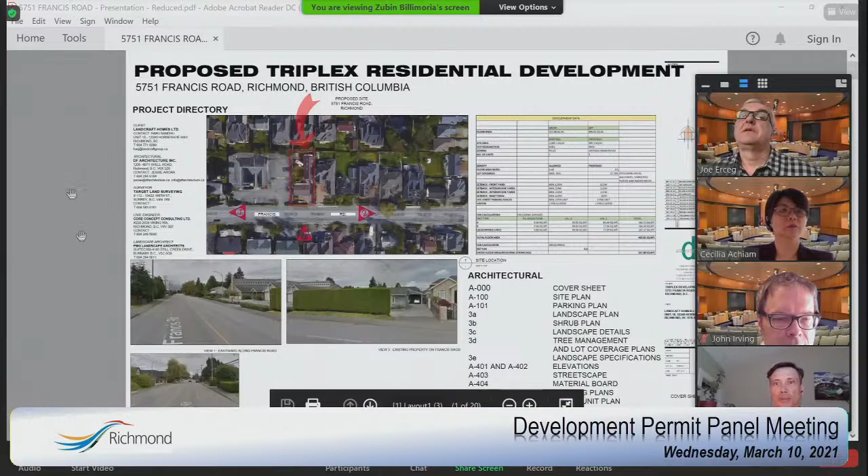Hi everyone, my name is Gordon, registered architect from DF Architecture, here with Zubin and Ray, also on the project. And from PMG Landscape Architecture, we have Denisa, who will be going up after us.

Just a quick run through for the context of the site. As Joe summarized, it's on 5751 Francis Road, with the aerial photo over here. Currently proposed as a triplex, just a slide through of the site.

There's a common driveway providing access to the three units, type A, B, and C, with type C being the convertible unit. Each unit has side-by-side garages with recycling and refuse inside the garage, and there's a common staging area for garbage outside as well.

There's a small pedestrian walkway within the common driveway for access to the two units in the back, B and A. There's a visitor parking space beside the type A unit. Each unit has access to a large outdoor amenity space: this one for type C, this one for type B, and over here for type A.

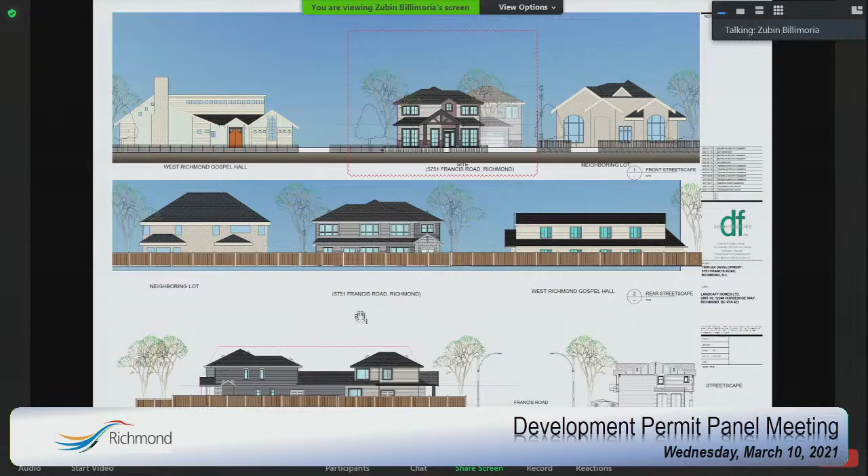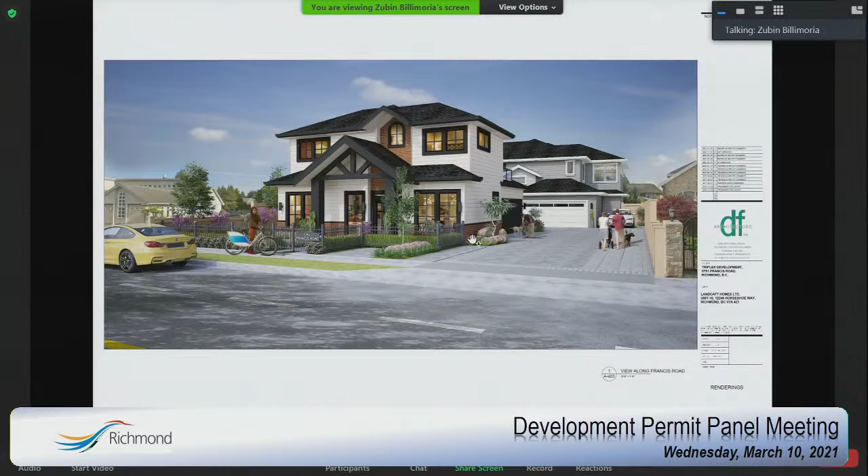Moving on to the materials we're proposing. Here are some renderings showing the proposed materials: some brick, and some stone on other facades. We have Hardie siding, and I'll fly through the renderings to give context. We have Hardie siding for most of the cladding, and Hardie shingles also proposed.

The site is well lit with bollard lights and exterior lighting for each unit. Exterior lighting is provided to keep the site well lit for both safety and aesthetic reasons. All proposed fixtures are downlights to reduce light pollution and to highlight the entrances of each unit.

The landscape architect can get into this more, but all the landscaping proposes shrubs lower than eye level, with lower branches above eye level, to keep sight lines in place. We placed windows strategically facing the interior driveway to give more surveillance of the common areas, while also keeping in mind privacy between each of the units.

In terms of sustainability, we have a few things that we're proposing. High reflectance roofing, high performance thermally broken double glazed windows, ceiling insulation with outboard insulation 2-inch rigid above grade, and enhanced air tightness by exterior air barrier detailing. So there's a number of things that we're doing sustainability-wise, and we can give more information about that if requested.

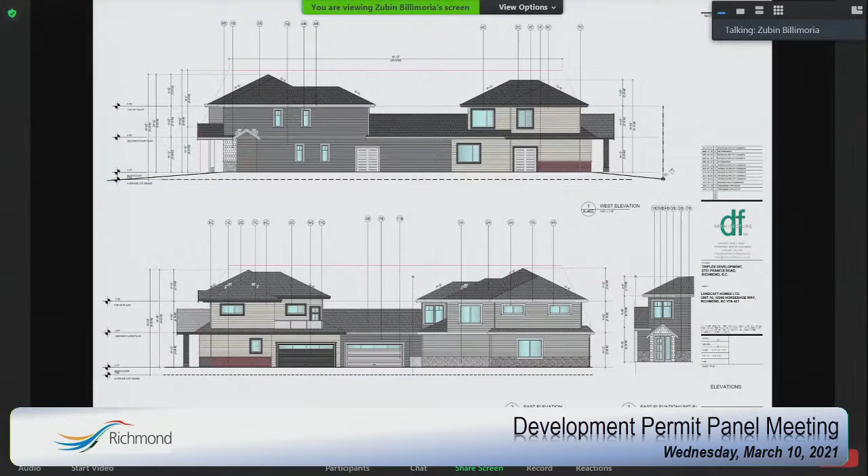For the site entrance, let me go back to the site plan here. So we try to keep connectivity to the public roads and the public sidewalks as best as possible with this common pedestrian walkway. The entrances to the adjacent sites, currently what we're showing here...

Let me just slide to the last page. Here we go. So we've done a mock-up of what the adjacent neighboring site can do in terms of a proposal. So we have a shared driveway that will access both properties. The adjacent property can develop something like a triplex here, sharing one single driveway, and then this will be a cross access easement to gain access to each of those units.

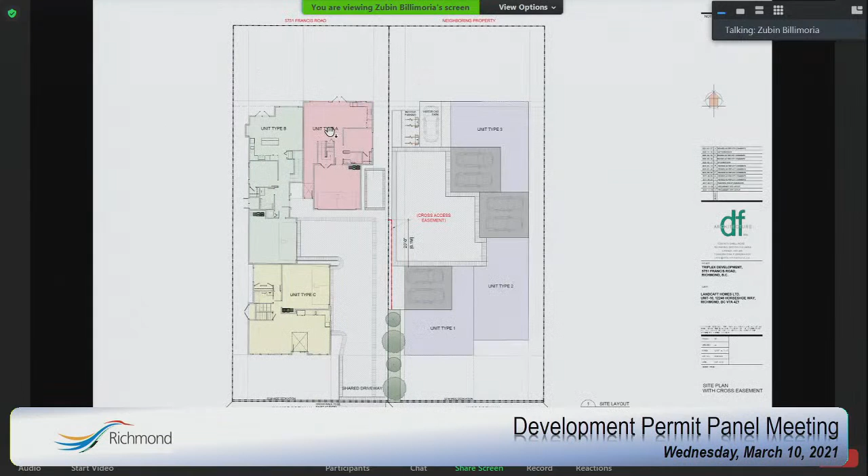So the interiors of each of the units - we have the floor plan. Here we go. So this is a Type C floor plan.

Just to hop in here, this is a Type C floor plan, which is the convertible unit, designed in terms of accessibility. It's an adaptable unit. All the units are 4-bedroom units and 4 to 5 bedroom units. They're pretty large, yet a little bit concise in size, so it becomes more affordable for the neighborhood. In terms of the accessibility of this unit, we purposely placed it fronting onto Francis itself, so that it has clear connectivity to the road for access.

And for going from one level to the other, we are proposing a stairlift for the time being. The master bedroom is designed as the adaptable bedroom, with the washroom and the ensuite also being adaptable type. The remaining 2 units won't be adaptable, but have a similar layout with almost 4 bedrooms. Each of the units is approximately 1,800 square feet in size.

I think now we could flip to landscape if they want to cover any of the points. Do you need that? Yes, thank you. Do you hear me? Yeah. Yes, we can hear you. Actually, now I can't hear you. You're muted. Now is okay? Yeah, now it's good.

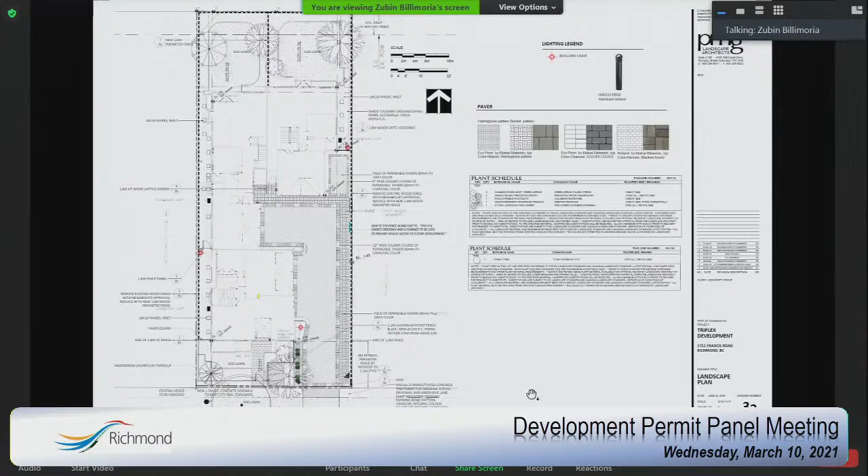Maybe I can get it started. Where is the garbage? Is it at the front there? And how is it screened? Sorry if I'm correct, but that's just the garbage staging area. Each of the units, as we've shown previously, has a space within the garages where we have allocated space to collect garbage. It's just that during the garbage pickup day, it would be difficult for the truck to come all the way in, so hence we've got a staging area up front.

So on collection day, you just roll the carts down to that little area. They wouldn't be there permanently.

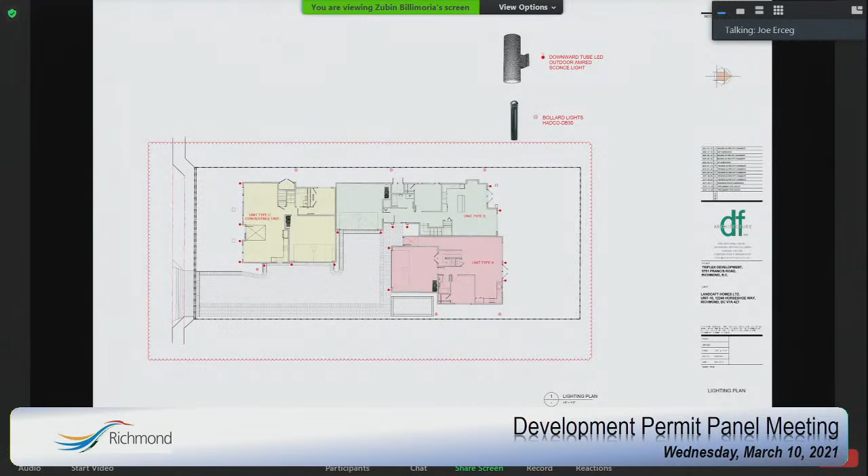And it looked in the rendering as if there was a little courtyard, a paved area adjacent to that staging area. What is that? That's the water meter location, sorry. There's a water meter coming in over there.

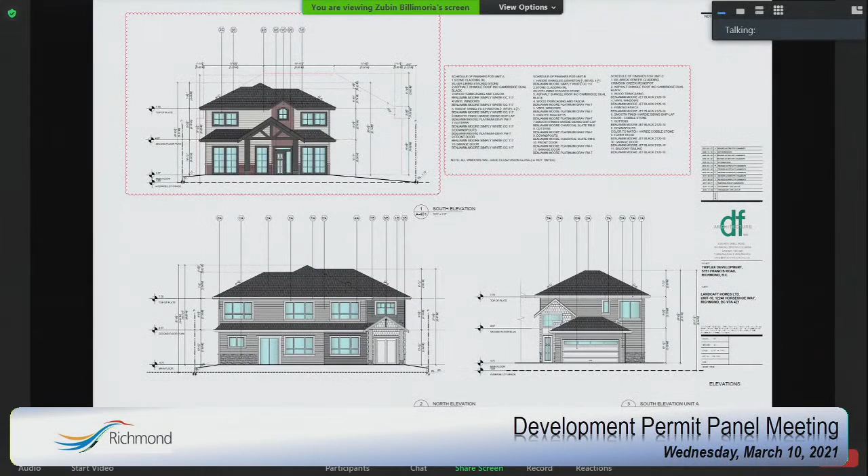So we were asked to leave a right of way for the water meter, and we've left it empty for that. So that's for the installation of the water meter? It seems like a large area. I think engineering had defined and asked us to leave that space, 2 meters by 3 meters up front, hence we have just allocated that space.

If they require a smaller area, we would more than happy to landscape it so that would look a little bit better, rather than having it exposed out there.

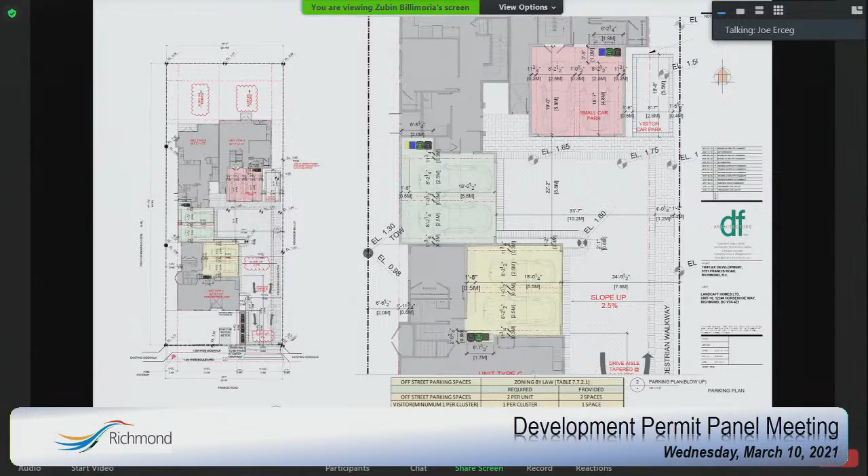Okay, last question for me anyway. I mean, it's a small site, well used, but I'm looking at that unit. If you can actually just go back to the previous plan. So what is it, type A unit? The cars there, I'm assuming that you've designed this so that all the cars can leave the site in a forward gear, right? Correct. So we have submitted an auto turn radius diagram to show that the turning radiuses are possible.

It is very tight. It isn't that easy. It sure looks like it for type A, because they have to swing 180 degrees, right? Correct. So how do they do that? I do not have the auto turn sheet right now, but do you want me to just pull it up to show you?

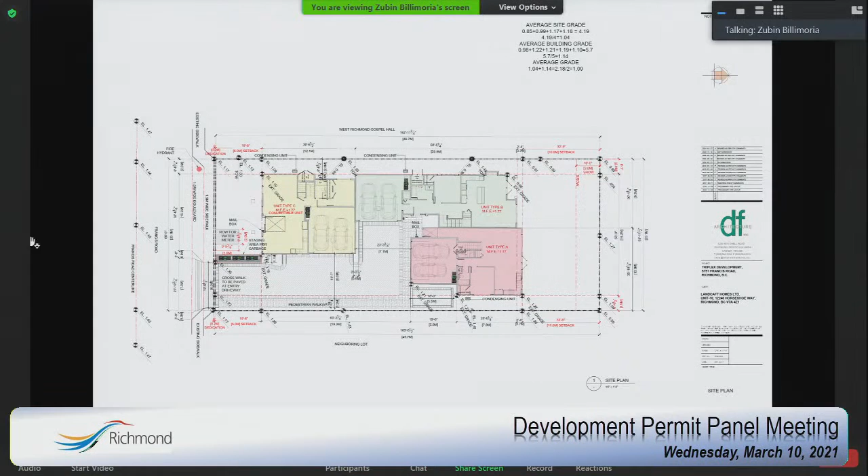Okay, give me a minute, please. I mean, if you have it handy. We have just submitted it to City. I'm just trying to search for the file. I didn't expect that question right now, to be honest. Well, we like to ask the unexpected.

Okay, so that's the civil engineer's drawings for each of the units that he has submitted to the city.

So that unit is really quite dependent on there not being anything parked outside the garage for the one beside it, right? I think for any of the units to be easily working, we would not be able to have anything parked outside. Also, we've reduced the curbs around the buildings to facilitate the turning. However, when the neighboring lot does develop, this will just open up the courtyard and it will become more feasible for the turning for all the cars.

Okay, so I guess you've precipitated another question from me. The neighboring lot, there are no plans currently for that to redevelop, are there? You don't control that lot, do you? We do not. Okay, so you just made provision for that possibility. All right, that's it for me.

Do any other members of the panel have questions? I do. I have a question.

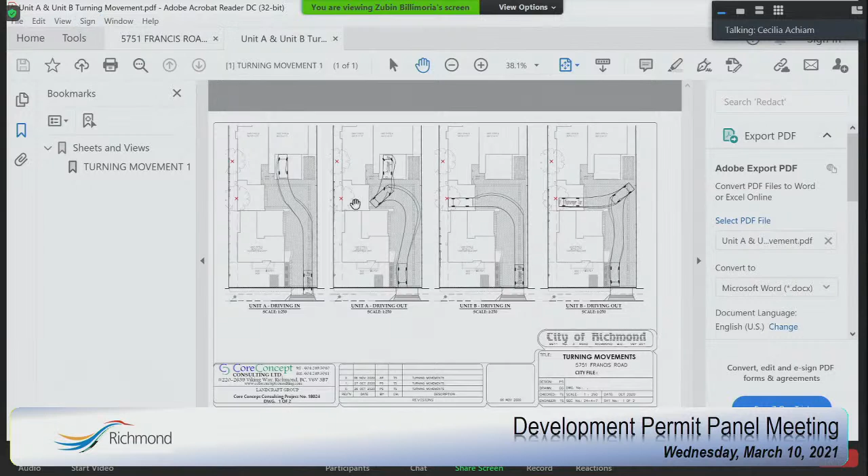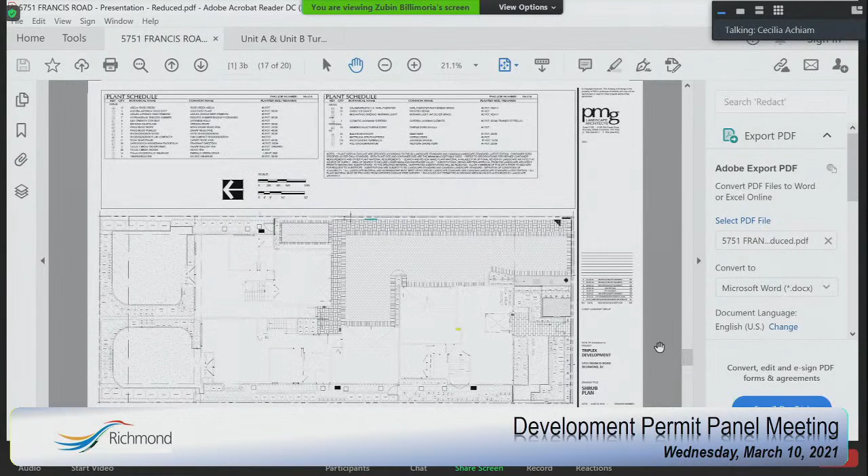To the point of having the shared driveway for the adjacent sites, we've had recently some issues with other stratas not sharing the driveway, despite there being legal agreements on title. I wonder, this is just a for-consideration item, whether that driveway design should indicate, almost break the walkway and indicate more of a driveway that will connect to the adjacent site, like from the actual paving, to give a clue so that people moving in understand.

Yeah, so I think that's a valid point. We could define the walkway up. The idea is that we do not control the design for the neighboring lot as of now, so we are assuming that this is how they would design that courtyard. They do have options of a few more design options that they could come up with. So we cannot control the actual access point and what they would need, but we would need to give that whole length as an access point. We would just keep it open right from where it's marked in red, cross-access easement.

We would be keeping that open, and then depending on how they design, they can work the entire courtyard out together. But yeah, we could break the flooring pattern, as you said.

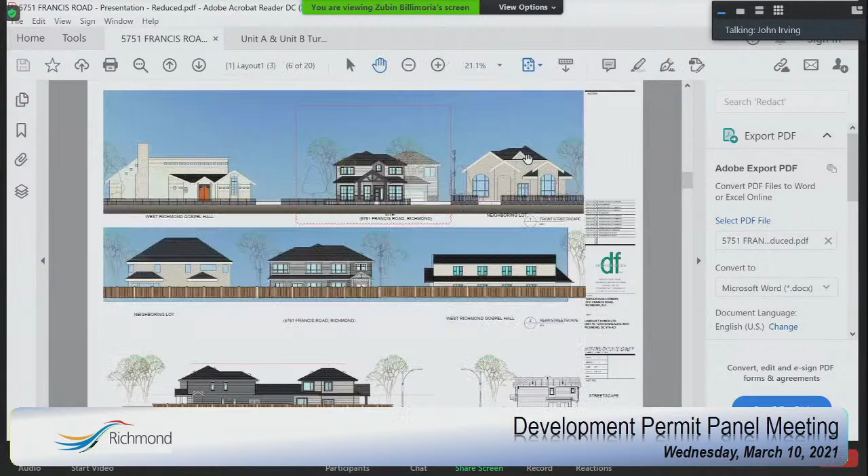Okay, thank you. Okay John, do you have any questions? Yeah, thank you, Mr. Chair. Just going back to the garbage, can those bins be moved out when you have two cars parked in the garage? Doesn't look like there's a lot of room there.

I think there would be some space, given we've got extra space in front of the cars. So if they were to move in front, they would have a little bit of a walkway from the side to take it in. The garages are tight, but they are as per the zoning sizes for garages, mostly for townhouse kind of developments. So yes, they are a little bit tight, and there would be some space, but it would be limited. It looks like, John, in a perfect world with a perfect driver, yes, there is room there, but if you have a larger than average vehicle, it might be an issue.

Yeah, well, maybe that can just be proved out in the same way you've done your turning radiuses. Sure, we could demarcate that. Yeah, we could ask staff to confirm that before moving ahead with it. Yeah, that would be great.

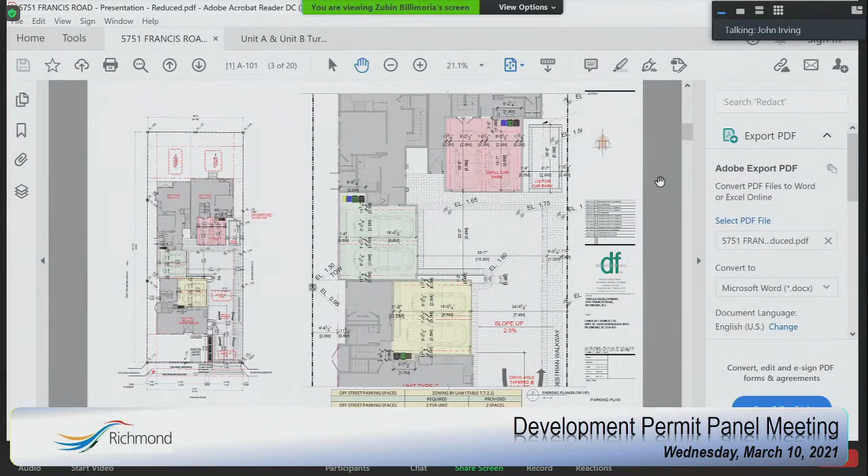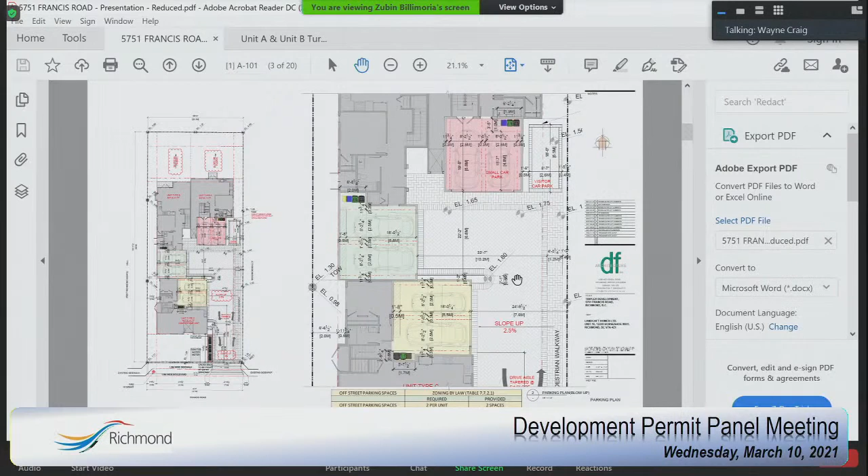Just a couple comments through the chair. There is a servicing agreement associated with this development for frontage works along Francis Road. The development will achieve step code 3 in terms of the energy step code. And in response to Ms. Achiam's question about cross access, there will be signage installed on the fence to indicate that the driveway would connect to the site to the east in future. That signage is inspected as part of the landscape inspection, so city staff will ensure the signage is installed as part of our landscape inspection process.

Right, and it looked like it's a newish house on the neighboring property, so it might be some time, right? That is correct, if at all. Yeah, okay, all right. Any questions for staff?

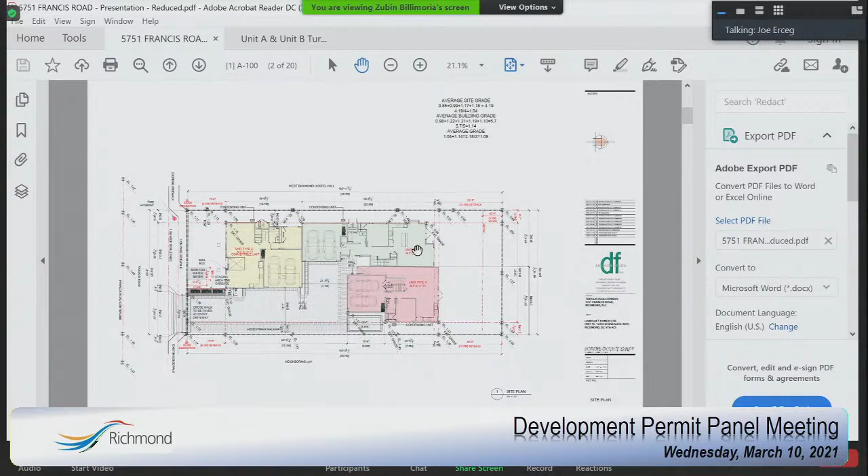Okay, any comments, questions? I think we've dealt with all of that. It seems like a good little project. I mean, it is pretty tight, so the attention to detail is important, but it looks like it's pretty well sorted out to me. So moved and seconded. I guess I'll call the question.